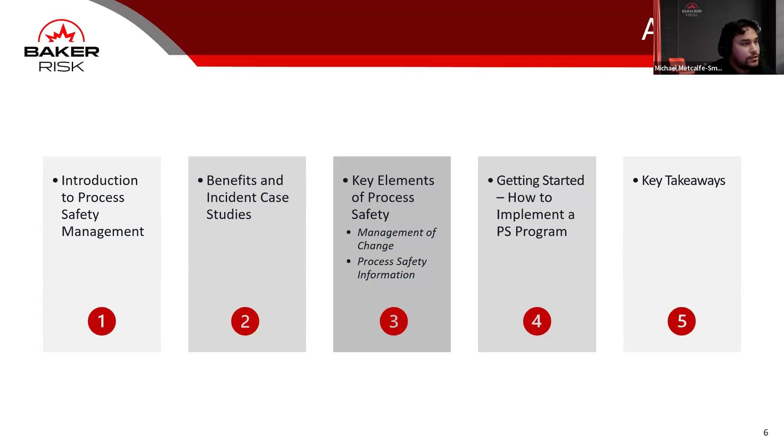All right, thank you, Michael. And thank you everyone for joining us today. So like Michael said, we're going to start out with the fundamentals of what process safety is, so that makes sure that we're all starting from the same point. And as we get into more of the details around the different elements later on in this webinar, we're all starting from a similar starting point.

So process safety, fundamentally, what it is at its core, is a framework or management system. Its purpose is to safely handle hazardous chemicals and to prevent releases of those chemicals that can lead to incidents involving fires, explosions, or toxic exposures. A lot of times you'll hear people say that the goal of process safety, very simply, is to try to keep it in the pipes, to prevent releases and to prevent the negative consequences that occur from those releases. In order to do that, process safety tries to build a comprehensive management system that pulls in multiple different elements to prevent those releases from occurring.

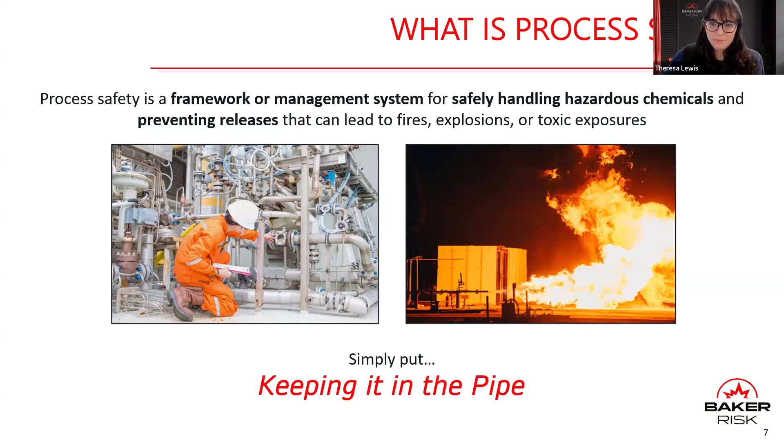It can be a little easier to define process safety, what it is, by first defining what it's not. So process safety should not be confused with occupational safety. A lot of times whenever you are talking about a good safety program in a plant or talking about a good safety record, people's first thought immediately goes to occupational safety and looking at things like slips, trips, and falls, having a good ergonomics program, focusing on that individual worker safety.

They typically are looking at those events that are higher in frequency, but have a lower impact per event. Plants can have a very comprehensive, very good occupational safety program, but that doesn't necessarily translate into having a good process safety program. So it's very important to first define the difference between those two things, because oftentimes when that focus is on occupational safety, process safety can get missed.

So process safety, it's focusing on those highly hazardous chemicals, on those highly flammable or toxic materials, specifically ones that are being handled in larger quantities.

These are chemicals that if you were to have a release, or an incident, say with reactive chemistry, you could have an effect of a fire, a toxic cloud or toxic exposure, or an explosion. These are typically those low frequency events that happen less often, but have a higher impact. While sometimes these events aren't focused on because they're not seen as often, whenever you do have a fire, a toxic exposure, or an explosion at a plant or facility, those are the really high impact events that can result in a higher loss of life or a higher business impact because of downtime. So having a good process safety program is just as important as having a good occupational safety program.

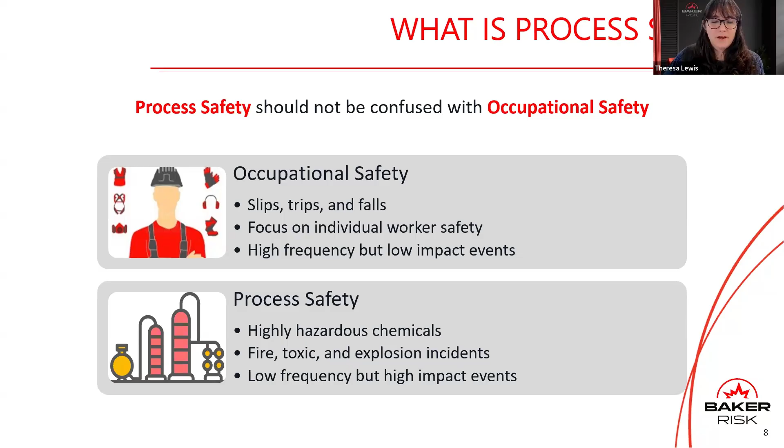Now that we've defined the difference between those two, we're going to talk a little bit about the regulations around process safety. In the United States, process safety is regulated under OSHA, under the Process Safety Management Standard. There's also the Environmental Protection Agency's RMP rule. These two standards regulate flammables and toxics that are specifically handled in bulk quantities at plants. For OSHA PSM, that's applicable to flammables in quantities greater than 10,000 pounds in a process, as well as select toxics listed in Appendix A of that regulation. EPA RMP has a very similar list of toxics, so there's often a lot of overlap between what's regulated under PSM or EPA RMP.

But the important thing to focus on, and what we'll be discussing in this webinar, is that even if a process or an entire facility isn't regulated under PSM or RMP, and even if they're not subject to those requirements, they can still benefit from process safety principles. There's still a large impact that can be had in terms of the safety of a plant and safe operations by implementing some or all of those requirements.

If you're not in the United States, there are other global regulations around process safety. In the EU, there's the Seveso directive. There are also many other countries that have implemented or are in the process of implementing process safety requirements in their legal systems. So outside the US, processes can still be subject to those requirements. And regardless of whether they're regulated or not, there are still many benefits to be had by implementing process safety.

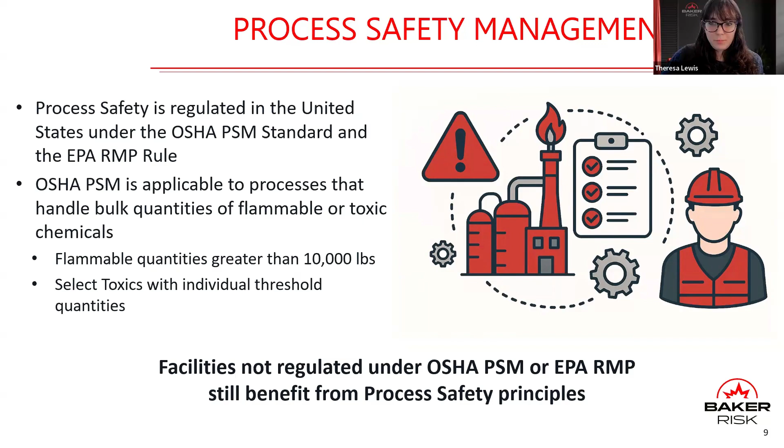Going into more detail on what those benefits are, fundamentally, process safety is a good business practice. Beyond the benefits of reducing incidents, there are many other things that come out of implementing process safety that we'll be going into throughout this webinar.

I wanted to start with a quote from Trevor Kletz. If you've gone to process safety conventions, I don't think you can go to the Global Congress on Process Safety without seeing this quote at least a couple times. That's because it's a really good quote, and it really defines what we're getting at when we talk about incident prevention. The quote is: there's an old saying, if you think safety is expensive, try an accident. Often, one of the things that gets in the way of implementing safety programs, and specifically process safety programs, is that there's a cost involved and a time commitment involved. But the benefits of incidents that have not occurred and have been prevented can be hard to quantify.

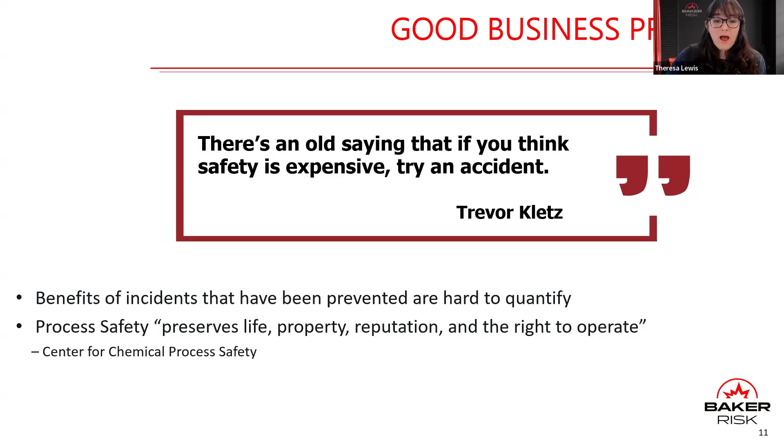But whenever a facility ends up having an incident, the impacts of that incident are very far-ranging, going from resulting in fatalities all the way to potentially shutting down facilities. The Center for Chemical Process Safety released a monograph called How Business Financial Decisions Impact Process Safety Performance, which I would highly recommend. They say that process safety is fundamentally a good business practice because it preserves life, property, reputation, and the right to operate. On this next slide, I'll go into some of those more concrete benefits.

At a baseline, if a process or facility is required to implement process safety, it needs to do so to meet those legal and regulatory requirements. This is compliance with standards like OSHA PSM, which I already mentioned, but also the general duty clause, which requires companies to provide workers with a workplace that's free of recognized hazards.

In addition, you can reduce incident rates by implementing process safety. That is one of the core purposes of process safety, is to reduce incidents. But outside of reducing those catastrophic incidents, you can also reduce those smaller releases or even those smaller quality incidents that can cause downtime or scrapped product.

It also ensures business continuity. By reducing downtime, both due to potential issues with just not maintaining your equipment or not having a good system in place for that, incidents also cause a lot of downtime. So in order to keep operations running smoothly, that's something that process safety can have that additional benefit with.

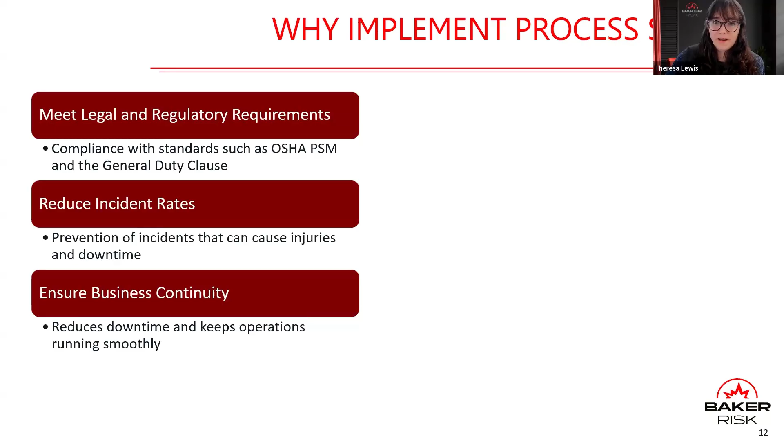Some more benefits are preserving assets. One of the elements, which Michael will be going into a little bit more detail in a minute, is mechanical integrity. So by standardizing inspections, testing, and preventative maintenance programs, the business will continue to run smoothly. You won't have as much downtime. You won't have as many issues with equipment.

You can optimize operations. Documentation of training as well as having standard operating procedures are two additional requirements of process safety. So by running smoothly, you can reduce waste, you can reduce deviations, you can reduce operator error due to just not having that consistent training.

And then lastly, there's that opportunity to adapt to new opportunities, because proactively managing changes, both in terms of the process and organizational changes, by having a system in place, it makes it much easier to adopt new practices or to adapt to new business opportunities quickly whenever you already have that framework in place.

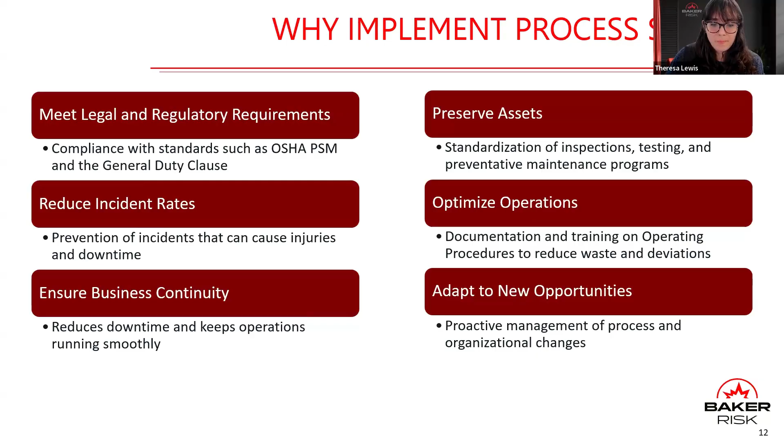So at a high level, those are some of the many benefits of process safety, showing that it goes beyond just meeting regulatory requirements or simply reducing incidents. It's also just a good business practice. So on this next slide, Michael will be talking about some of the elements of process safety.

Thanks, Theresa. The specific regulation that outlines process safety management is OSHA 1910.119. The standard outlines 14 different elements that comprise a successful PSM program. And you'll notice that together, these elements, they form an arch. And under that arch is the protection of your employees.

The foundation of any successful PSM program is commitment from management. Successful PSM, it's not just about checking the box for each of these 14 elements. It's really about creating a culture that is supported and developed by all levels of an organization.

Now, implementing 14 different elements may seem daunting, but implementing them, it's a gradual process. An effective PSM program, it's not something that's going to be developed overnight. At first, you can start with simple procedures, and this can be things like developing a straightforward way of reviewing hazards and managing changes. The first focus is developing those basic procedures for the different PSM elements and getting those procedures written down and established.

As the organization gets more comfortable, these procedures can be developed further and expanded upon. Once the procedures for different elements are sufficiently developed, they will start to connect with one another, and then you're going to have a cohesive PSM program. A little later, we're going to go into more depth with two of the PSM elements, which are management of change and process safety information.

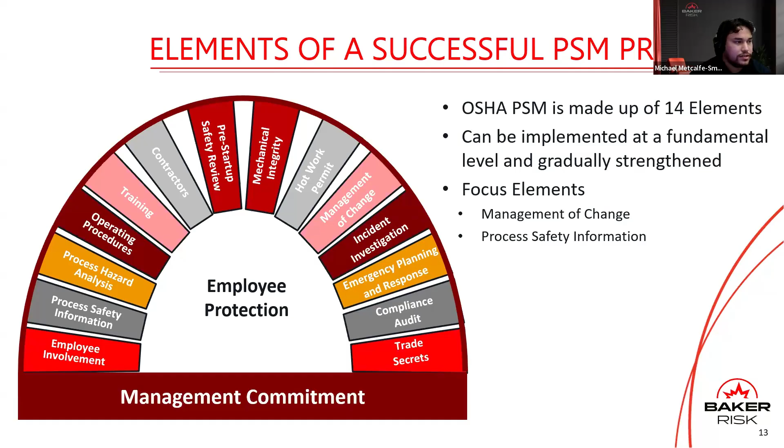Next slide. Now we're going to take a look at a few incidents involving facilities that were not required to have a PSM plan in place. The first is a Foundation Food Group, which has a poultry facility in Gainesville, Georgia. As you can imagine, a poultry plant would not be dealing with enough hazardous materials to trigger the requirement for a PSM program. However, there was a release from the liquid nitrogen control system in a freezer room.

The liquid nitrogen quickly vaporized, and 6 workers in the freezer room asphyxiated, and they sadly passed away. 3 other workers and a firefighter were also injured due to asphyxiation-related injuries.

OSHA does not list nitrogen as a hazardous chemical, but Foundation Food Group was still fined by OSHA for not having sufficient atmospheric monitoring and alarm systems, insufficient emergency planning and response, insufficient training, and also having a subpar PSM system. They were fined almost $1 million, and their share price also saw a dip.

And that's a trend that is seen at other organizations that have a major incident. There was an analysis that considered 12 companies that recently had an accident, and on average, the share price of those companies dropped 15% over the course of 24 months.

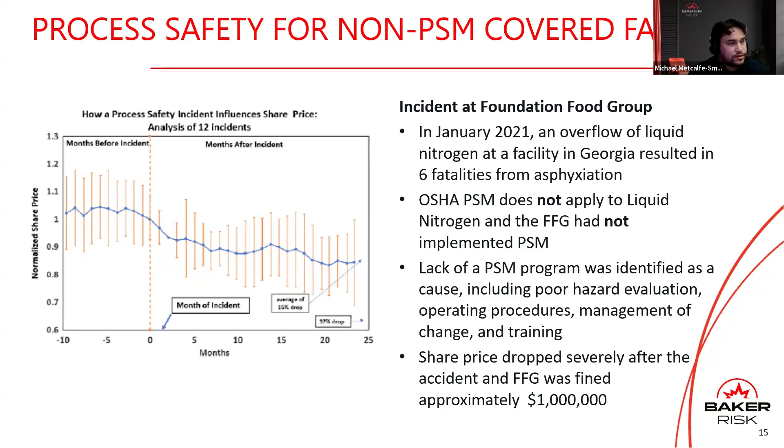The next case study we'll be looking at is in the RNG space, and it occurred at a sewage treatment plant in Avonmouth, Bristol, in the UK. There was hot work being performed on a biosolid silo, and unbeknownst to the workers on the silo, the biosolids had produced methane, and that was in the headspace of the silo.

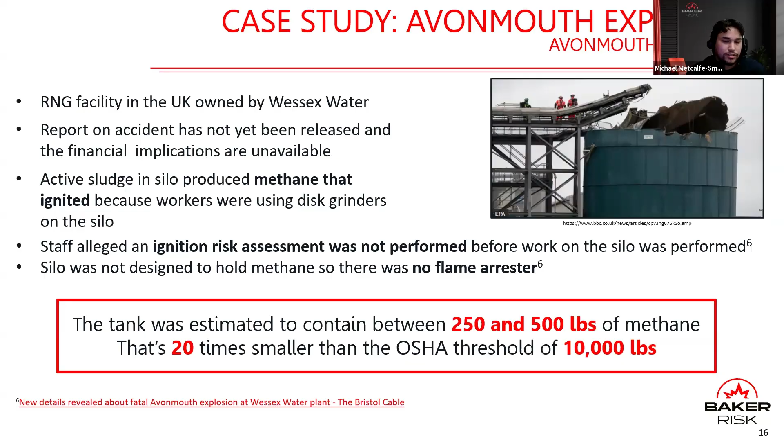The workers on the silo were using angle grinders, and the sparks ignited the methane, causing the silo to explode. The silo didn't have a flame arrestor installed because Wessex Water had not anticipated the presence of methane in that headspace. Staff also claimed that an ignition risk assessment was not performed before starting the work on the silo. The remarkable thing was that in the headspace of the silo, it was estimated to contain between 250 to 500 pounds of methane, which is 20 times less than the OSHA PSM threshold of 10,000 pounds.

Next slide. Sadly, there were 4 people working on that silo, and they were all killed by the explosion. One of the people killed was a 16-year-old apprentice.

This is an example of what can happen when hot work is treated as a routine action as opposed to a process critical action. In the fallout of this accident, there was a conversation in the UK about the safety and viability of RNG long term. The reputation of Wessex Water also worsened significantly, and they faced a lot of public scrutiny.

There has not been a report on the accident released to the public, so it's hard to say what the financial implications are. However, since the explosion, Wessex Water has faced prolonged regulatory scrutiny, and they have been forced to perform regular systemic safety reviews, which very closely emulates the requirements of a PSM program. This just shows that even though OSHA PSM is not a requirement, it still should be thought of as a best practice globally. Now I'm going to hand it back over to Theresa to talk a little bit about hot work.

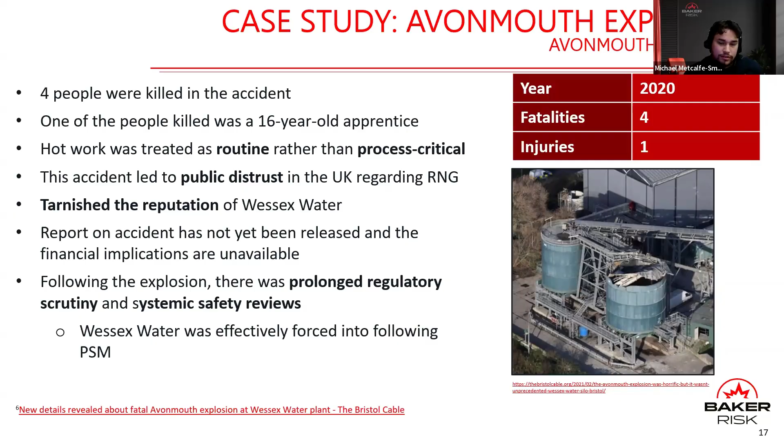One of the common themes that we see whenever we look at incidents like that is that there are so many root causes that it comes down to. One of the ones that Michael mentioned was they hadn't performed a risk assessment. They didn't realize the hazards or the need to install a flame arrestor. Another one is not having a hot work program that really evaluated the hazards surrounding that hot work.

So, hot work is one of the elements of PSM. We have a slide on here. We aren't going as in depth with this one as we are next with some of our other key elements. But I wanted to talk about hot work permits, because the requirement to issue hot work permits is required on PSM covered processes. But the OSHA standard refers you back to practices required in another OSHA standard on welding, cutting, and brazing.

So really, like many of the process safety elements, this is a performance-based standard that is either echoing requirements from other standards or really allowing companies to implement them in a way that is effective. And like many other process safety elements, this really integrates well into existing programs and practices. Many facilities, not even ones that are not PSM covered, are still required to have a hot work program, and are required to do some of these reviews required under PSM. That interconnectivity between process safety management, good engineering practices, and existing safety and health standards—they all intertwine, they often interact.

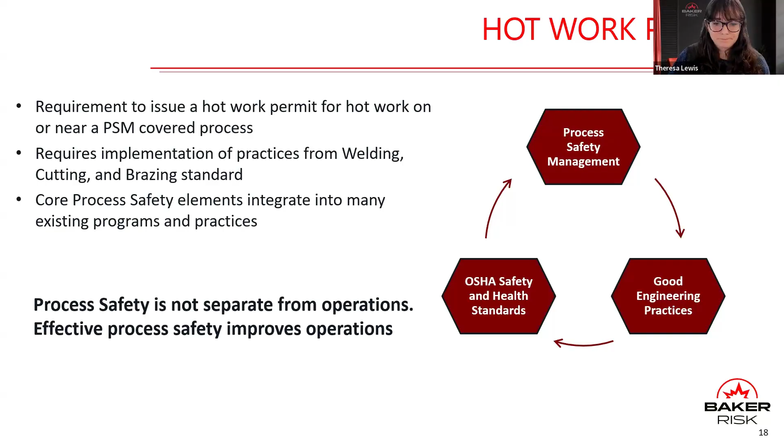And so with that, I will dive into our first key focus element, which is management of change.

So management of change, and I am going to be saying the words management system quite a bit throughout this webinar because fundamentally that's what process safety is. So management of change, it is a management system, and the goal is to review and approve changes before implementation.

So these can be changes to procedures, to processes, they can be introducing a new raw material, they can be changing the standard operating conditions, pressure and temperature in a process. It could be changing the order of steps and making sure the operators are trained on those. It could be organizational changes. But fundamentally, the goal of a good MOC program is to prevent unintended consequences from those changes and from those undocumented or unreviewed changes.

So this can be for a capital project. This could be a full process hazard analysis being completed through multiple stages. This could be a small checklist that's looked at by one or two people to review those changes and to review what could potentially happen that's not intended.

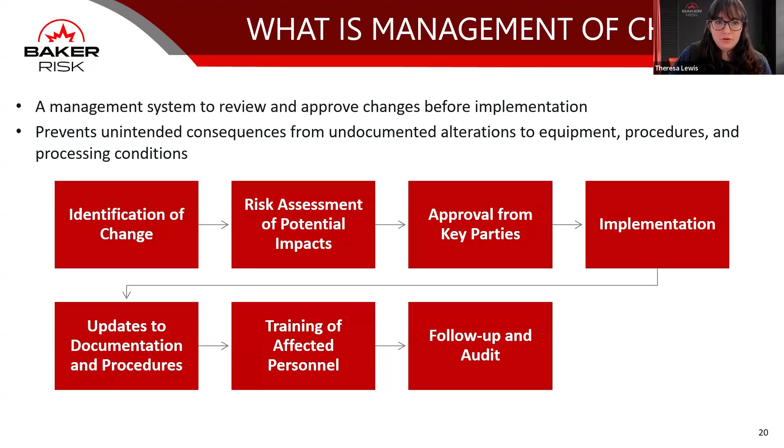But going into what management of change is and the benefits of managing change, one of the key things to note here is that effective change management, it is a best practice across industries. So management of change is one of the elements of process safety that has been widely implemented or is being widely implemented, even for facilities that aren't required to have it due to PSM. And that's because the benefits of MOC on effective operations are very widespread.

So initially you have safer operations with fewer incidents. As you go through the risk assessment, as you go through the approvals for those changes, you're usually catching things that may not have been caught if you didn't have a formal process. So as part of that, you're making sure that you're getting that review from the key parties. You can reduce downtime from unplanned changes. This goes back to making sure that the equipment that you're putting in or the things that you're updating or changing are appropriate.

So I always like to pull this back to maintenance because if you are going out there, you're changing the type of equipment that you have in your plant, it's not being documented, that information isn't getting sent into your CMMS system, your maintenance guys aren't getting trained on it, that can create a lot of issues down the road where things aren't getting updated. If you have a breakdown or a shutdown, you may not have the spare parts you need. You may not have the people aware of even what was installed.

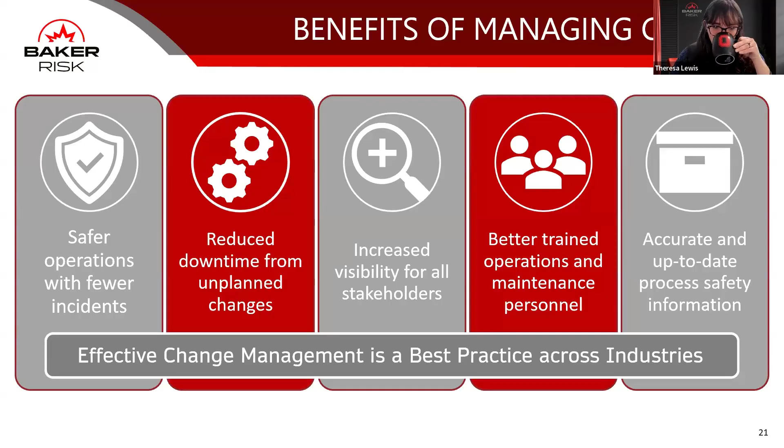So people often say the phrase, you can't manage what you don't measure. I changed this: you can't manage what you didn't document. If you're making changes in your facility, if you're not documenting those changes, you're not reviewing them, you're going to have a lot of inaccuracies in your systems. All of the different elements of process safety, they need to work together because all of these are different parts and pieces of an overall management system.

So I think as we've been talking, we can see that management of change, like every other element, it touches on many other parts of process safety. So if you aren't managing change, if you aren't training people, updating your documentation, doing those hazard reviews, you're going to have issues downstream. And establishing a system to manage change, what it fundamentally does is reduce those unintended consequences. So correctly managing change, correctly going through that process, it keeps your process safety system standing.

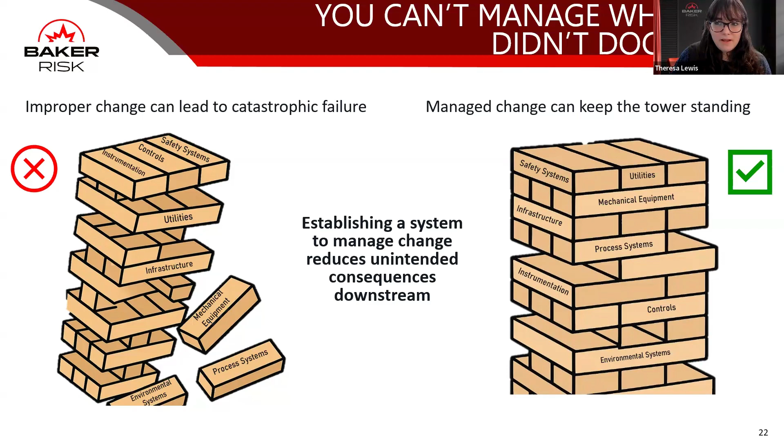So at this point, I will hand it back to Michael to talk about process safety information. Thanks, Theresa. So process safety information, which is also referred to as PSI, it can really be thought of as your compass for decision making. It quite literally gives you the orientation you need before taking any step or deviation in your process.

It'll tell you what chemicals you're dealing with, how equipment is designed to operate, and where the limits of that equipment truly are. PSI also keeps you aligned with what's safe, what's possible, and what could go wrong. It can be thought of almost as a reference point that keeps the entire team grounded. So instead of navigating blindly, you're making informed, confident decisions that protect people, equipment, and the process itself. Like management of change, it's important to think of PSI as an industry best practice and not just a requirement of PSM where you're checking a box.

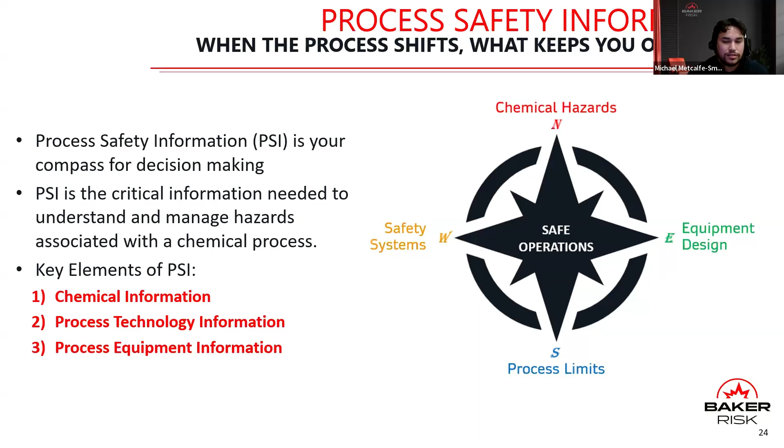When we do talk about PSI, we usually break it up into three key elements. Chemical information, which includes things like SDSs and permissible exposure limits. The next is process technology information, so your PFDs, safe operating limits, and your process chemistry. The third is process equipment information, and that includes things like your P&IDs, your materials of construction, applicable design codes and standards, relief systems, as well as electrical classification. Next slide.

Essentially, if you know your process, you can protect your people. PSI can prevent accidents by identifying hazards before they lead to potentially catastrophic incidents. You develop a clear understanding of the process limits and the equipment capabilities. Your decision making will be more informed during changes, troubleshooting, as well as emergency response.

PSI enables effective training by providing accurate information to personnel, and things like onboarding new personnel becomes an easier, more straightforward process. Additionally, you stand to gain more valuable information during safety studies like HAZOPs, quantitative risk assessments, and failure mode and effects analyses because you ultimately make fewer assumptions because your process info is more accessible. An extension of that is having good PSI is also good for contractors as they will likely not have as much familiarity with your process before starting work.

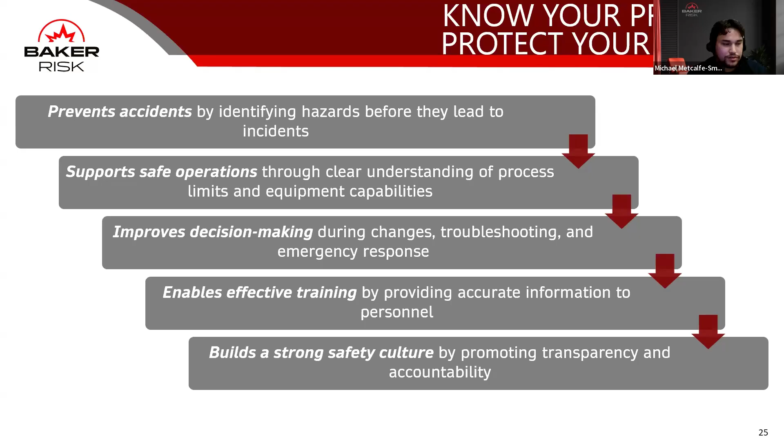It also strengthens your safety culture by making key information open and visible to everyone. When people can clearly see the hazards, the limits, and the expectations, it creates transparency. And that transparency naturally leads to accountability because everyone understands what safe operation looks like and what their responsibilities are. With PSI, the whole team works from the same facts and there are fewer gaps in knowledge from person to person. Next slide.

There's also a lot of value in keeping good PSI. You'll likely have more uptime, which will consequently protect revenue. Good PSI can also lower insurance costs because it shows insurers that you truly understand your hazards. When your chemical data, equipment limits, and safety information are clear and well maintained, insurers will see a facility that's managing risk proactively, and they will reward that. Strong process safety practices and good documentation lead to better risk ratings, which then translates into lower premiums.

Good PSI is also going to save money because it prevents maintenance mistakes as well as project rework. When drawings and technical data are accurate, crews don't waste time fixing the wrong problem or redoing work caused by outdated or incorrect information. Clear PSI just makes everyone's jobs easier. When employees have clear and accurate information about the process that they're working on, how equipment works, and what those limits are, they can work with confidence instead of feeling a sense of frustration. That clarity reduces errors, reduces stress, and it just helps people do their jobs well, which we all want.

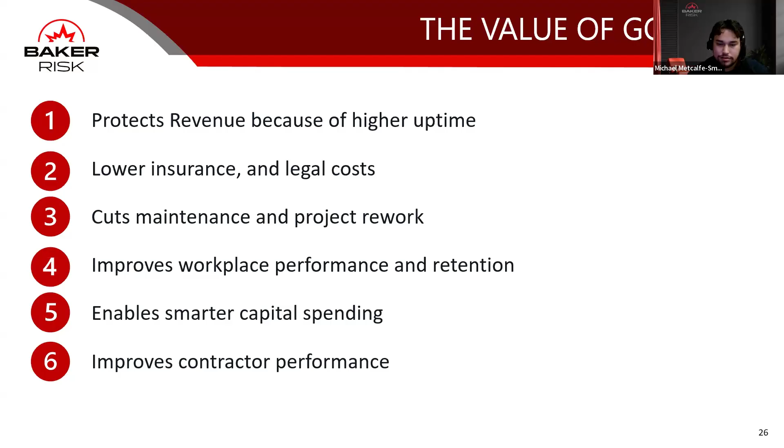Effective PSI will also enable smarter capital spending because it gives you a clear picture of what your facility actually needs. When your technical data, equipment specs, and design limits are accurate, you avoid oversizing equipment, duplicating systems, or investing fixes into problems that don't really exist. Contractors also become far more effective because they walk in with the right information from day one. When everything is accurate and controlled, contractors are going to spend less time hunting for answers and more time actually doing the job that they came in to do. Now, I'm going to hand it back off to Theresa to talk a bit about implementing a process safety program.

So we focused on two specific elements of process safety, and we talked a little bit about where you would start with those. But now I'm going to talk through how you would get started on an overall process safety program. And this can apply whether you have no process safety program at your facility already, or if you are already implementing some of the elements of process safety but recognize that they need to be improved or strengthened. This is also a good way to get started with that. This is going to be at a somewhat high level because there are a lot of specifics with each of these key elements. But fundamentally, to have a good process safety program, there needs to be that commitment.

It needs to start with management. You also need to get the commitment from the folks at the site, from the different organizations at the site itself. But starting with that management commitment, that's what's really going to drive having a successful program. Part of that is making the case for process safety as a best practice in order to see all of those benefits that we've been discussing here for the last half hour: reducing incident rates, improving operations, reducing downtime, and improving effectiveness. So getting that management commitment is really the key starting point of process safety because everything else is going to build on that. The next step is to review existing programs.

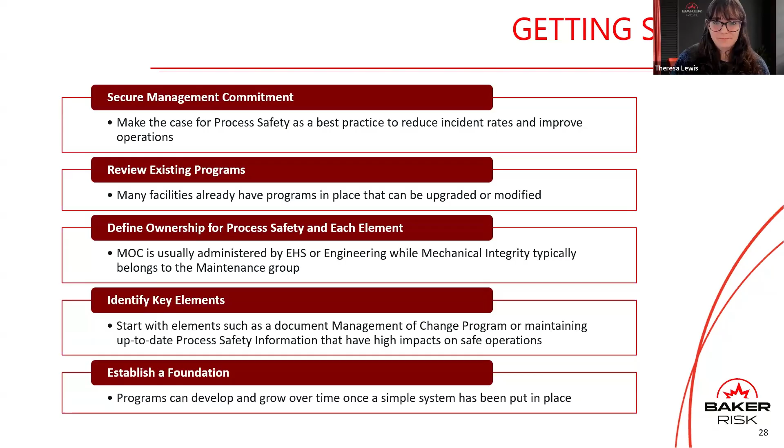It should be noted that successful PSM programs are inherently a function of the organization's commitment to the program. Companies need to fully buy in to get all of the potential benefits that we have mentioned here today. Next slide.

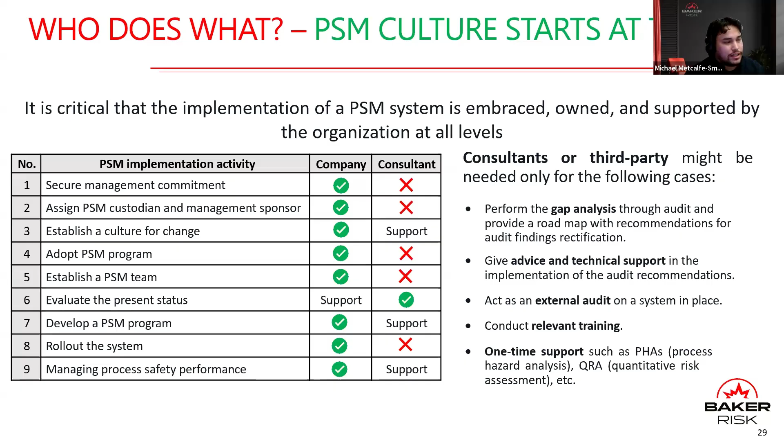The takeaways from this webinar should be: if you are already required to implement a PSM program, do so. And if you already have a PSM program or something equivalent, you have to keep improving and iterating upon it. If you don't meet the requirements to trigger a PSM program, or if you're outside the US, you should still develop a strategy for mitigating risks and protecting your employees, assets, and the public.

If you look beyond compliance, you stand to have fewer incidents. And as Theresa stated before, safety is much cheaper than an accident. Safer operations mean more efficient operations. Unsafe practices can lead to more downtime, trickier maintenance, and unwise capital spending. Implementing a comprehensive safety program can reduce your organization's financial risk, and you can see savings through increased process efficiency and lower insurance premiums. Implementing key process safety elements is an industry best practice to prevent incidents, reduce business interruptions, and manage operational risks.